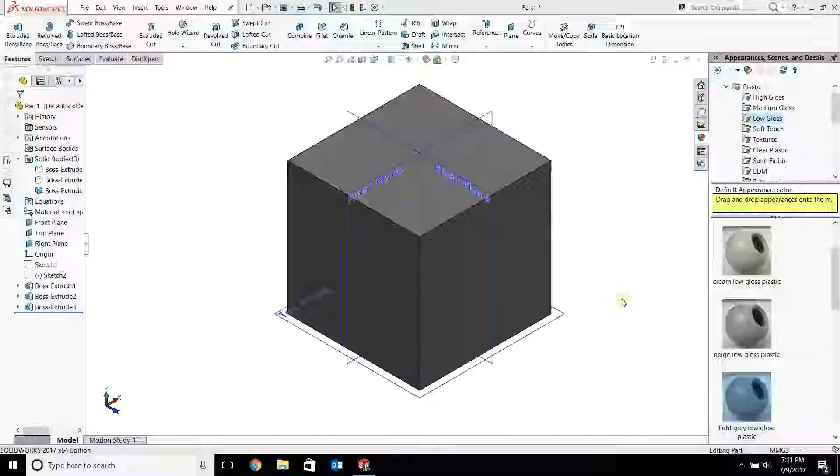So number 8 is the copy tool. I'm going to be using the same 10 by 10 by 10 cube from the previous exercise and duplicate this 7 times.

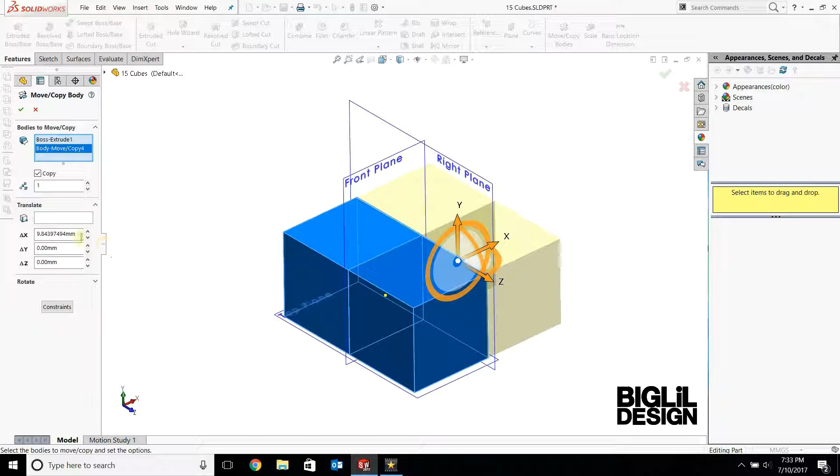I'm going to move this over 10 millimeters and make a copy of that. Then move these guys 10 millimeters this way and make a copy of them. Then make a copy of all 4 of them and move them up 10 millimeters. So now I have 8 cubes, and then I'll just combine them all.

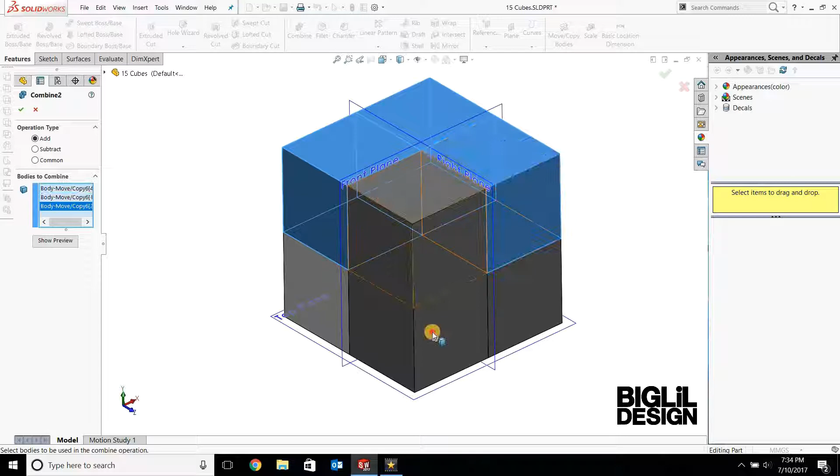So we have a cube that's 20 millimeters on all sides.

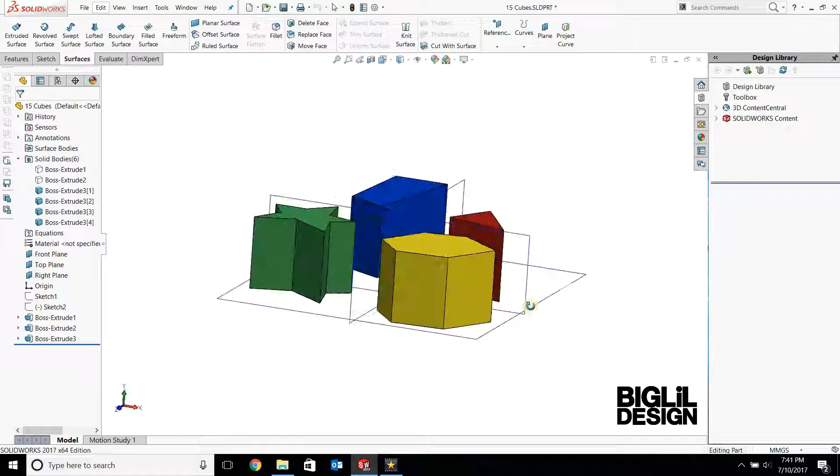So number 9 is using surfaces. We have 4 different shapes here, and they've all been extruded 20 millimeters high. To create these surfaces, I'm going to be using these edges on these shapes, using the Loft tool.

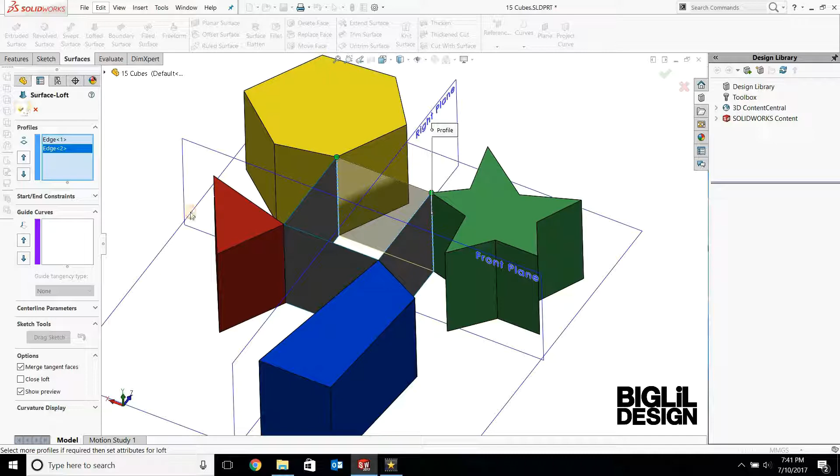Now that we have the 4 surfaces connected to these shapes, we can hide them and just focus on the surfaces on the top and bottom.

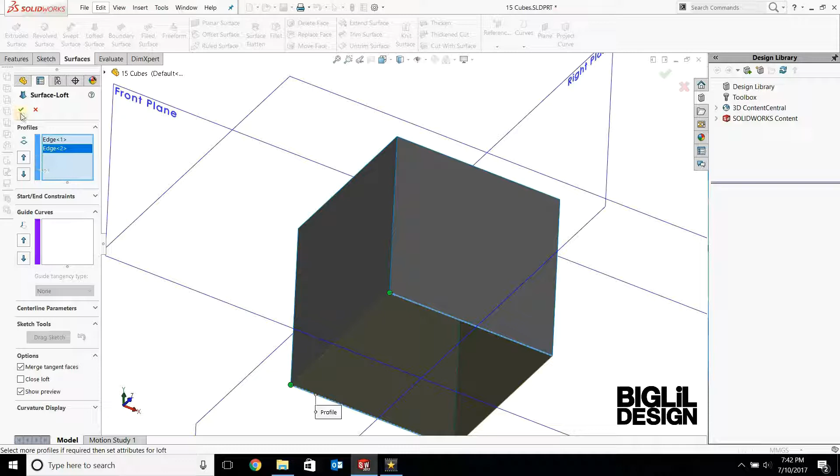The next step is just knitting all 6 sides to create a solid cube. So now you have a cube that's 20 millimeters on all sides.

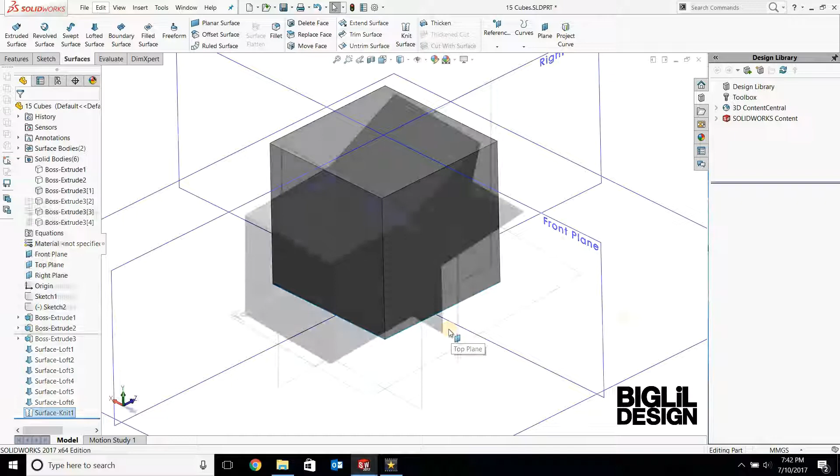So number 10, I'll be using the Cut With Surface tool. Here we have a cube that's 20 millimeters on all sides, but it has an irregular shape added to it. What I'm going to do is use this sketch, this line, to extrude and create a surface to cut this side of the cube away.

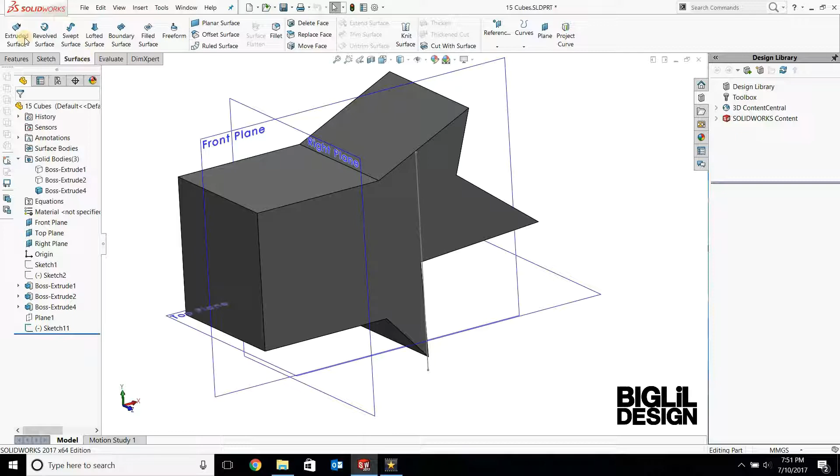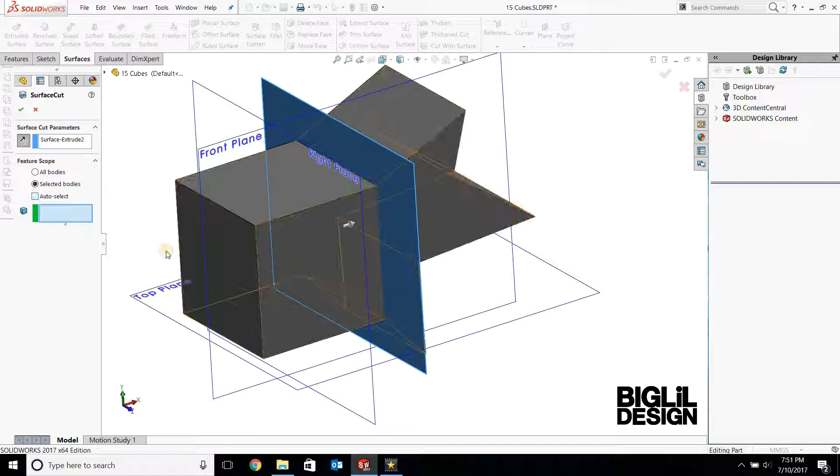So I'm just going to extrude this line to create a surface. Then I'm going to use it as a tool to cut, changing the direction of the arrow to remove this side of the surface. So now we have a perfect cube.

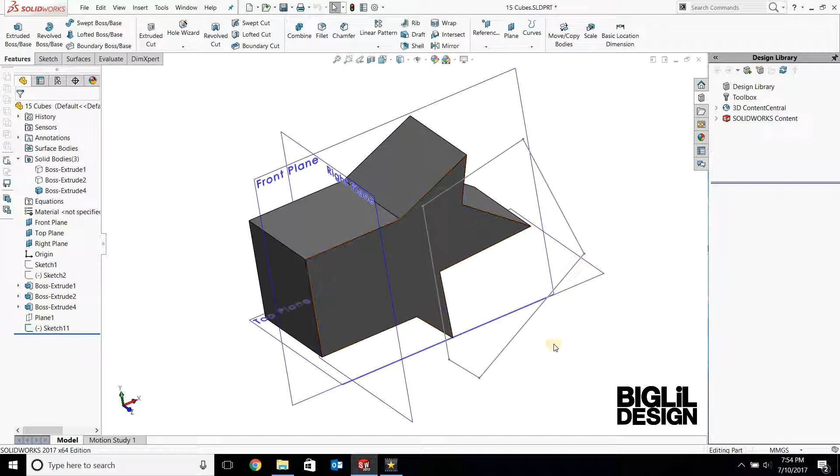On number 11, I'll be using the same shape from the previous exercise, but this time I'm going to use a solid shape instead of a surface to cut away this irregular shape added to this cube. So I already sketched out the shape that'll be cutting away this part, and I'm just going to extrude it.

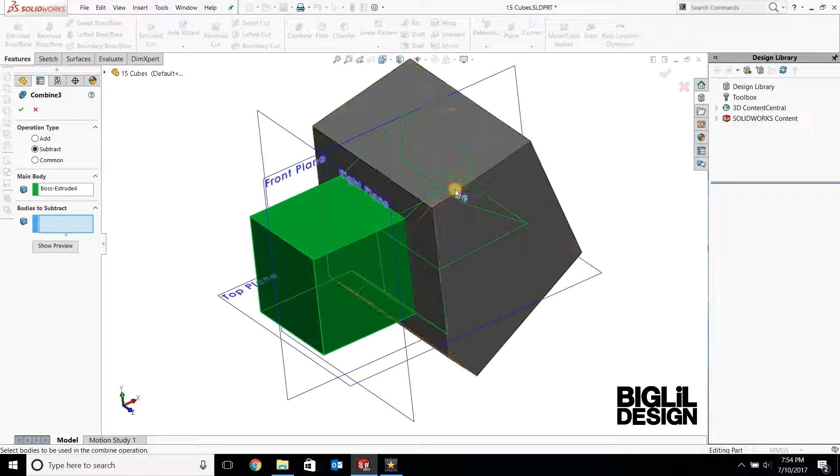And now just subtract. So now we have a perfect cube.

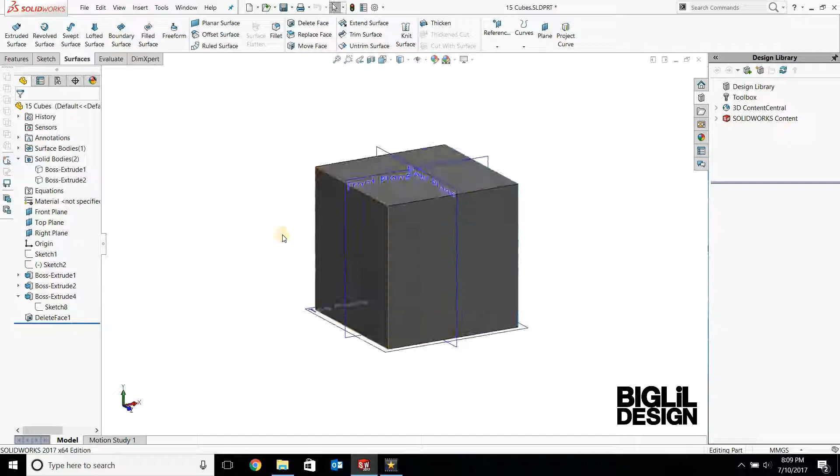For number 12, I'm going to be using the offset surface tool. Here we have a 20 millimeter cube with one side of the face deleted. So with the offset surface, I'm going to select the opposite surface by 20 millimeters to close off the cube.

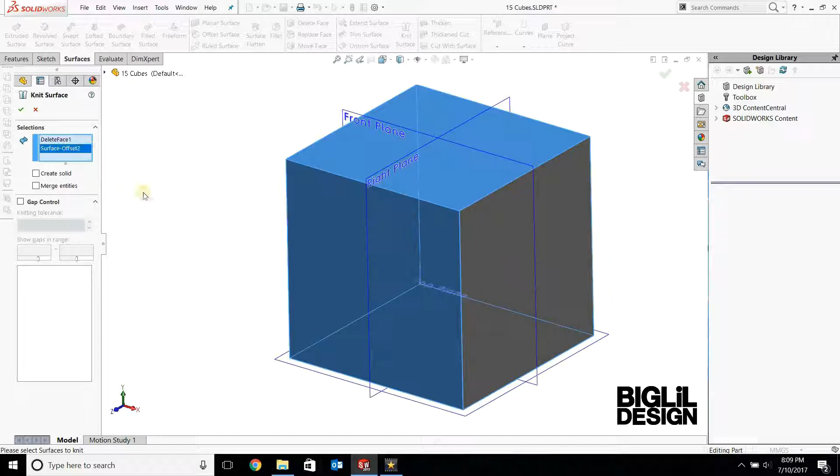Now I'm just going to have to knit it to create a solid.

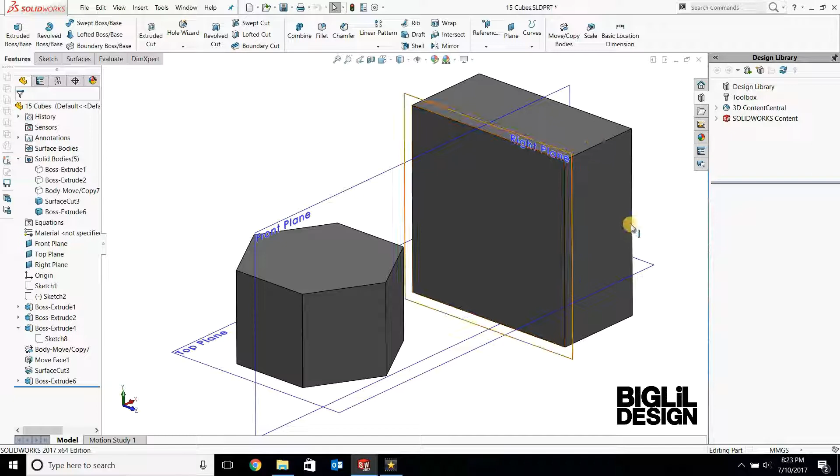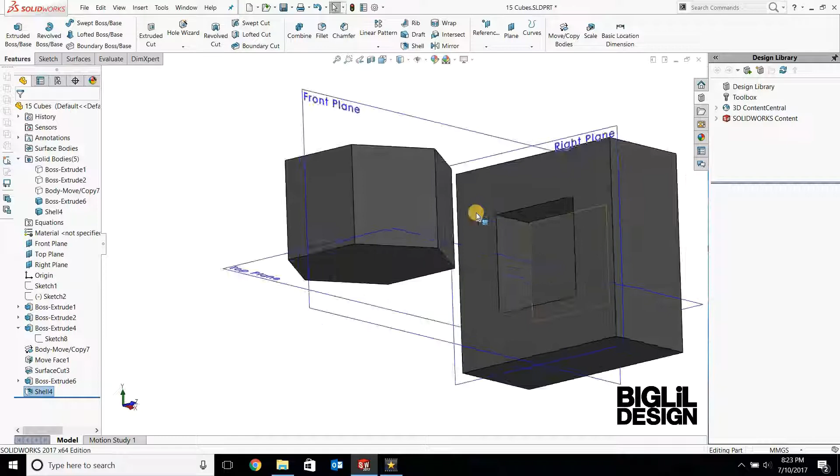First I'm going to shell this and have a wall thickness of 10 millimeters. Okay, so now that we've shelled it, what you're seeing here is a negative shape of half of a 20 millimeter cube.

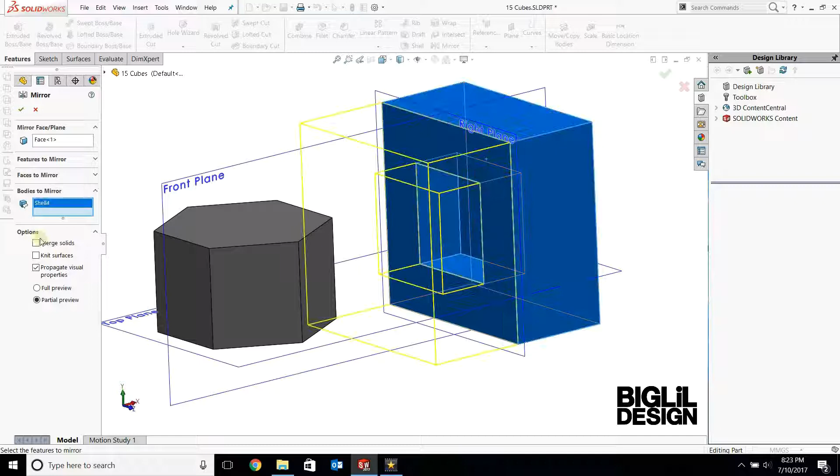So to get the other half, I'm going to mirror it using this plane, then merge the two bodies together. So now you can see inside we have a 20 millimeter cube.

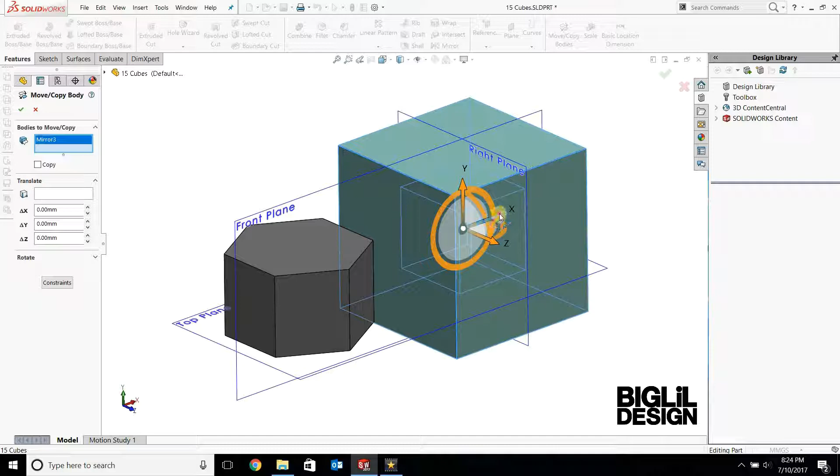So now I'm just going to move this large cube over here to this hexagon and use it as a cutter, and then subtract.

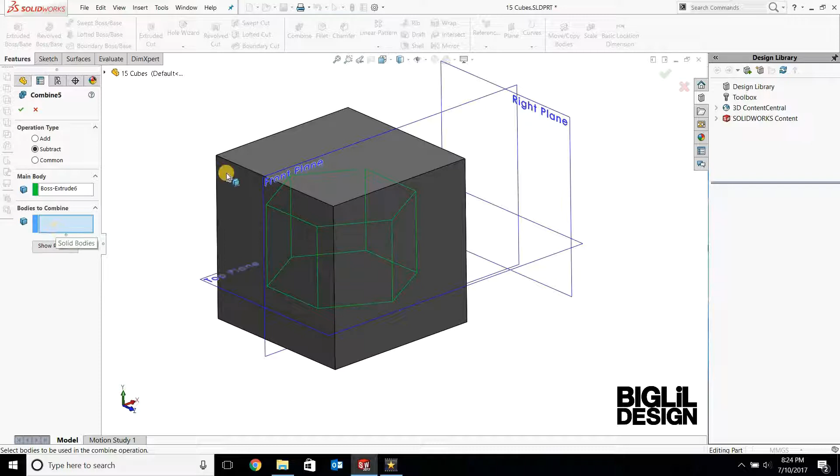So I've selected the hexagon shape inside. There. So now we have a perfect 20 millimeter cube.

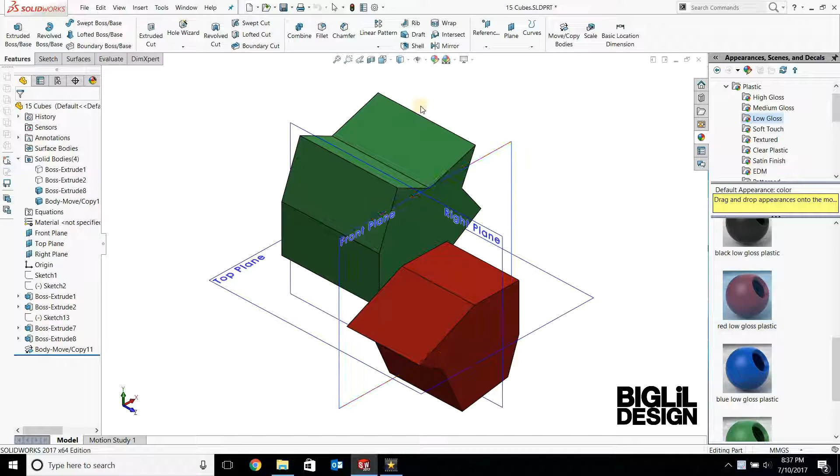For number 14, I'm going to be using the Intersect tool, or in Solidworks it's called Common. So right now we have a green object and a red object. When I do the wireframe, you can see that when they overlap, they create a cube shape.

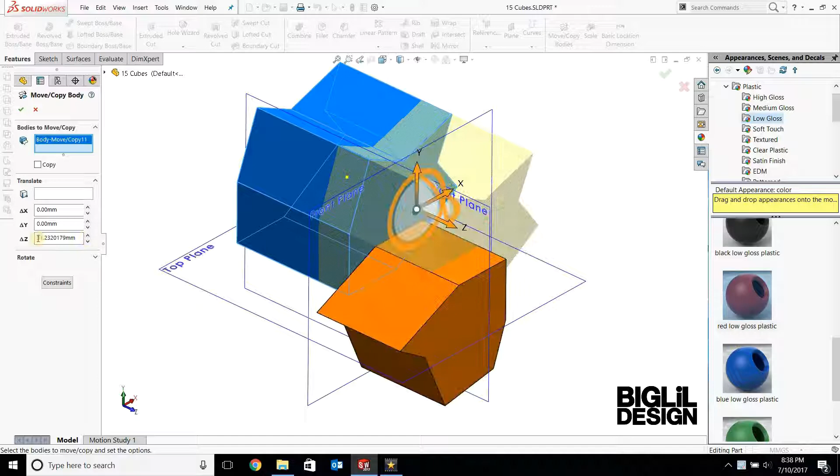Right now they're 10 millimeters apart, so I'm going to have to move the green object 10 millimeters plus another 20, so they're overlapping by 20 millimeters. Now we can select the Common in Combine tool, select the green and the red, and now we have a perfect 20 millimeter cube.

For number 15, the last one, I'll be using the split tool to create the 20 millimeter cube. So right now you have 20 millimeters on its depth, 20 millimeters on its height, but 40 millimeters on its width.

So I created a sketch and I'm going to extrude this sketch into a surface, making sure that it goes through the entire solid.

Unlike the surface cut on number 10, instead of using this surface to cut away this side of the solid, I'm just going to split it into two 20 millimeter cubes.

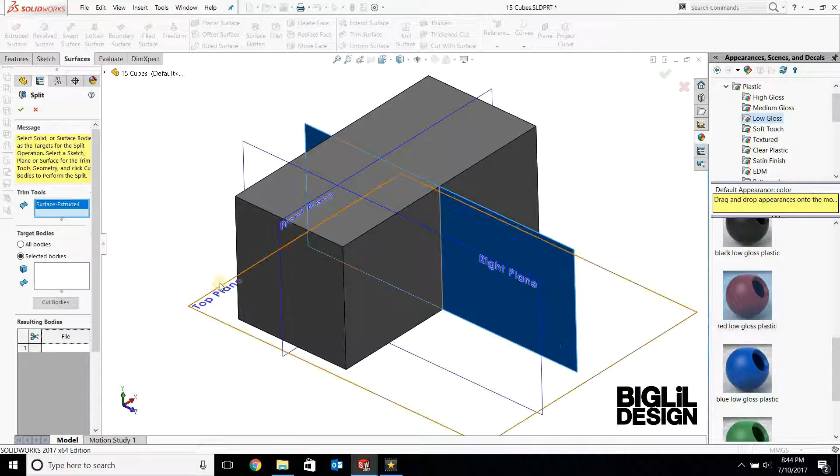So this is our splitting tool, and this is the object that we're going to be splitting. Okay, so now if I hide this surface, now we have two 20 millimeter cubes.